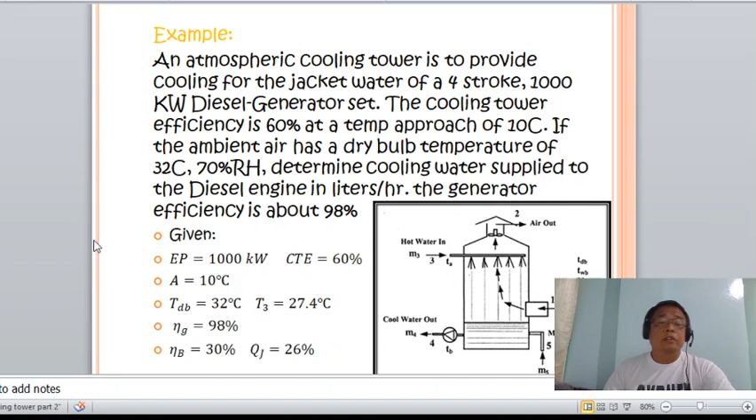So the generator efficiency about 98%. Okay, so class, so this is the given. So the combined power is 1,000 kilowatt, approach is 10, cooling tower efficiency is 60, the dry bulb temperature is 32, the wet bulb temperature is 27.4, generator efficiency of 98, brake thermal efficiency of 30, and the heat carried by the jacket water is 26%.

Okay, so let us now come to the solution of this. Okay, so the mass of makeup water. So knowing that the approach is equal to the temperature of the leaving water minus the wet bulb temperature. Okay, substituting this to the formula for cooling tower efficiency, and then the temperature of the leaving water now is 37.4 degrees Celsius. Okay, so TB rather is 37.4, and then getting TA now. So TA, or the temperature of the water entering the tower, is 52.4 degrees.

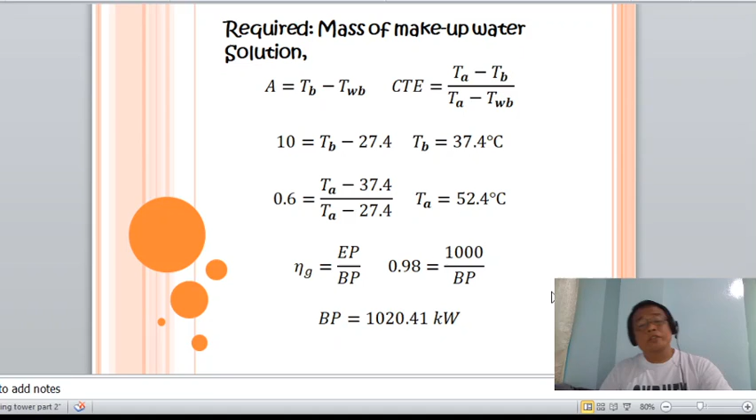And then getting the brake power, knowing the thermal efficiency and the generator efficiency rather, and the combined power, the brake power now is 1020.41 kilowatts. Okay? So, again, getting the energy chargeable, knowing the thermal efficiency of 30%. So, energy chargeable now is 3,401.37 kilowatts. And then, getting the heat carried by the jacket water, that is 884.36 kilowatts.

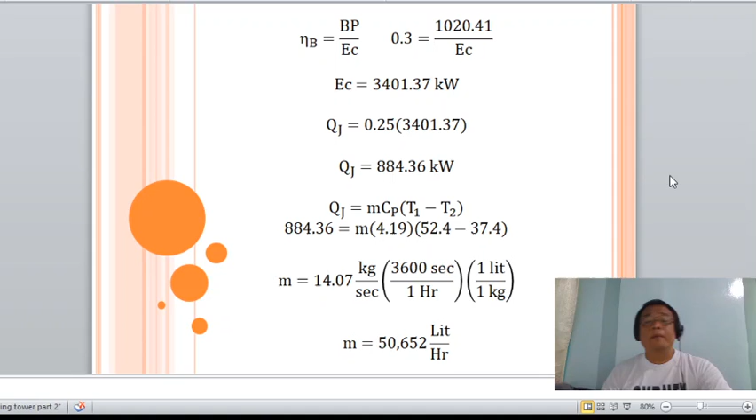Okay? So, getting now the mass flow rate in liters per hour, the answer is 50,652 liters per hour. Okay? So, take note, class, that the heat carried by the jacket water can be equated by the mass multiplied by the Cp and the change in temperature of the jacket water. Okay?

So, another example, a mechanical draft cooling tower receives 150 cubic meter per second of atmospheric air at 101.325 kilopascal and 32 degrees Celsius, and then 55% relative humidity, and discharges the air saturated. Okay? So, 100% relative humidity meaning. Okay? So, at 36 degrees Celsius, if the tower receives 210 kilogram per second of water at 40 degrees Celsius, what will be the temperature of cold water? Okay? So, the given class is, of course, the initial temperature of the water is 40, and then mass of water is 210 kilogram per second, and the volume of air is 150 cubic meter per second.

Okay. So, from the data of the saturated air, so at 36 degrees Celsius, saturated, so from psychrometric chart, the value of the enthalpy is 135.56 kilojoules per kilogram. And then looking now at the right portion of the psychrometric chart, the humidity ratio now is equal to 0.039 kilogram water per kilogram of dry air.

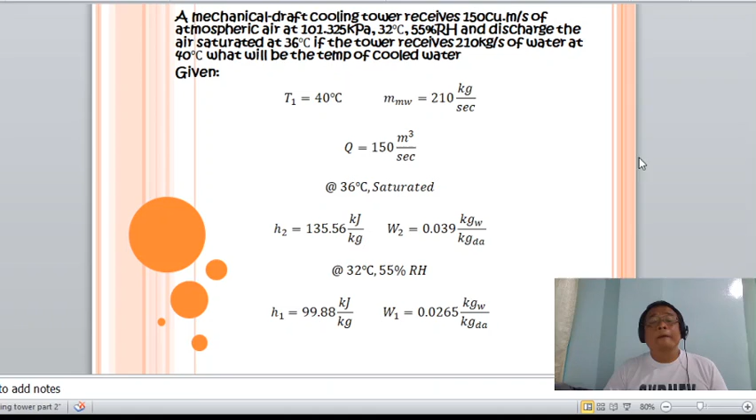And another at 32 degrees and 55% relative humidity, again from psychrometric chart, the enthalpy now at 1 is 99.88 kilojoules per kilogram. And then again, looking at the right portion of the psychrometric chart for humidity ratio, the value is 0.0265 kilogram water per kilogram of dry air.

Okay? So, getting now the temperature at 2 or the temperature of the cold water from the ideal gas equation or equation of state. So, PV is equal to MRT or density is equal to P over RT. Substituting values, knowing that the pressure is 101.325, the gas constant for air is 0.287 kilojoules per kilogram Kelvin, and then the temperature of air is 32, getting the absolute, plus 273. The density of air now is 1.158 kilogram per cubic meter.

Okay, so getting now the mass. Knowing the density, density is equal to mass over the volume. Okay? So, the mass now of air is 173.7 kilogram per second. Okay? So, take note that the heat carried by the cooling water is equal to the heat absorbed by the air passing through the cooling water.

So, we can equate now that 2. Knowing that the mass is 210, the specific heat of water at constant pressure is 4.19, the initial temperature of water entering the tower is 40, and the temperature of cold water is unknown, and the mass of the air is 173.7 multiplied by the change in enthalpy. Therefore, the temperature of water leaving the cooling tower is 32.96 degrees Celsius. So, this is easy.

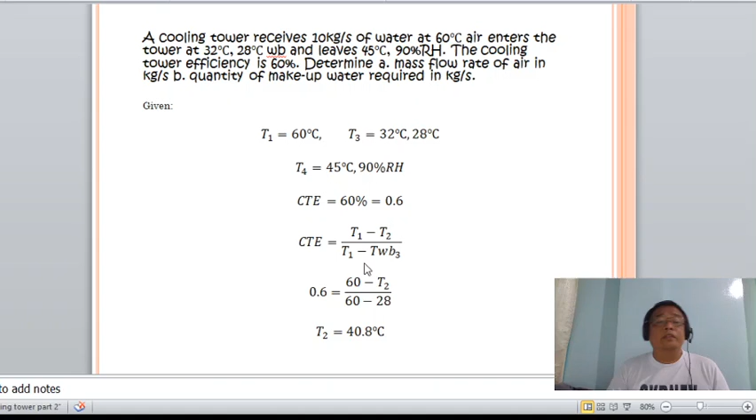Another: a cooling tower receives 10 kilograms per second of water at 60 degrees Celsius. Air enters the tower at 32 degrees Celsius, 28 degrees centigrade wet bulb, and leaves at 45 degrees, 90% relative humidity. Cooling tower efficiency is 60%. Determine A, mass flow rate of air in kilograms per second, and B, quantity of makeup water required in kilograms per second.

So again, given is the initial temperature is 60, and T sub 3, the temperature of the air rather, is 32 degrees dry bulb and 28 degrees wet bulb, and the exit is 45 degrees Celsius and 90% relative humidity. The cooling tower efficiency is 60%. So, getting now the temperature of the leaving water, substituting values from the cooling tower efficiency formula, T sub 2 is 40.8 degrees Celsius.

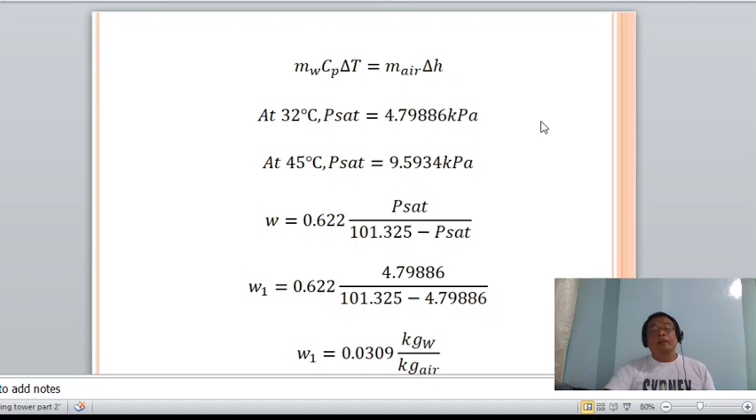Take note again that the heat carried by the cooling water is equal to the heat absorbed by the air. At 32 degrees, saturation pressure is 4.79886 kilopascal, and at 45, the saturation pressure is 9.5934 kilopascal. From the formula, humidity ratio is 0.622 multiplied by the saturation pressure divided by the atmospheric pressure minus the P saturation. Therefore, the humidity ratio of the air entering the tower is 0.0309 kilogram of water per kilogram of dry air.

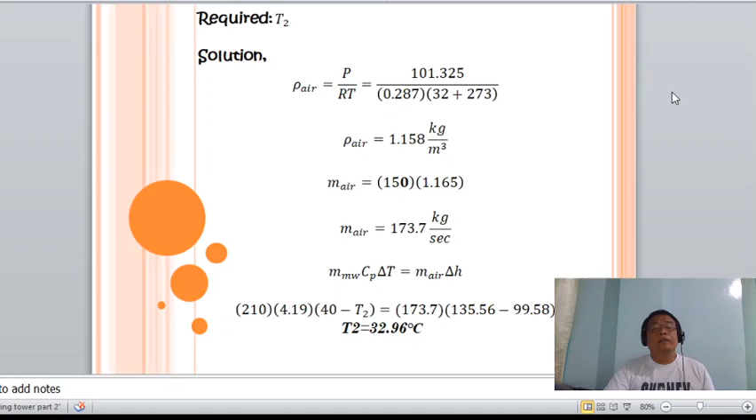Next, let us take the humidity ratio of the leaving air. Again, from the formula, 0.622 multiplied by the P saturation, 9.5934, over the atmospheric minus the P saturation at 2. The humidity ratio is 0.065. This is not W sub 1 but W sub 2, I'm sorry. So that is 0.065 kilogram of water per kilogram of dry air.

Let us now consider the formula for the enthalpy. The enthalpy of the air is equal to Cp multiplied by the temperature plus the humidity ratio multiplied by the enthalpy of water. That is equal to 1, the Cp, multiplied by 32, the temperature, plus 0.0309 multiplied by 2559.84. So the enthalpy is 111.099 kilojoules per kilogram.

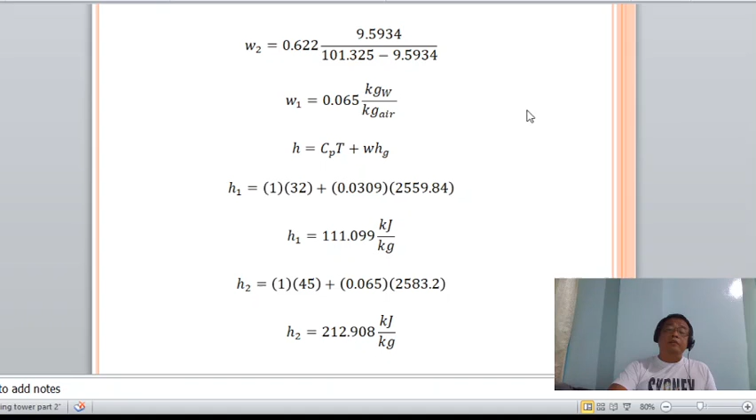Same for the enthalpy of the leaving air, at 45 degrees. Substituting values, the specific heat is 1, the temperature is 45, plus 0.065, the humidity ratio, multiplied by h sub g at 45 degrees, which is 2583.2. Therefore, the enthalpy of the leaving air is 212.908 kilojoules per kilogram.

Again, equating the formula, the heat carried by the jacket water is equal to the heat absorbed by the air. Substituting values, mass of water is 10 kilograms per second, specific heat of 4.187 or 4.19, multiplied by the change in temperature of 60 minus 40.8, equals mass of air multiplied by the change in enthalpy of air. Mass of air is 7.89 kilograms per second.

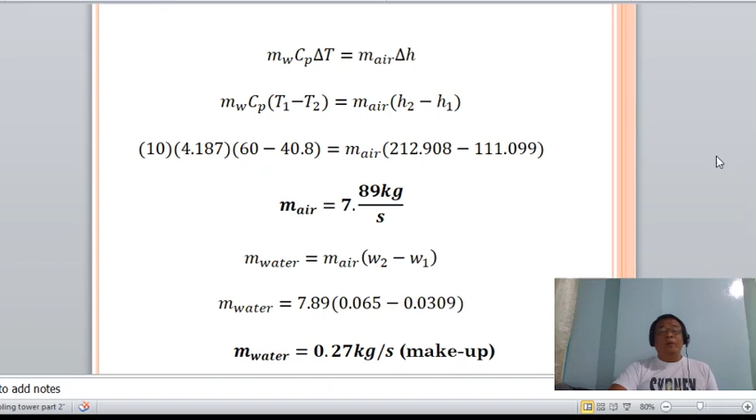Also, mass of water is equal to the mass of air multiplied by the change in humidity ratio. So mass of water is 0.27 kilogram per second. This is the make-up water required, in order to replenish the water carried by the air as it passes through the cooling tower: 0.27 kilogram per second.